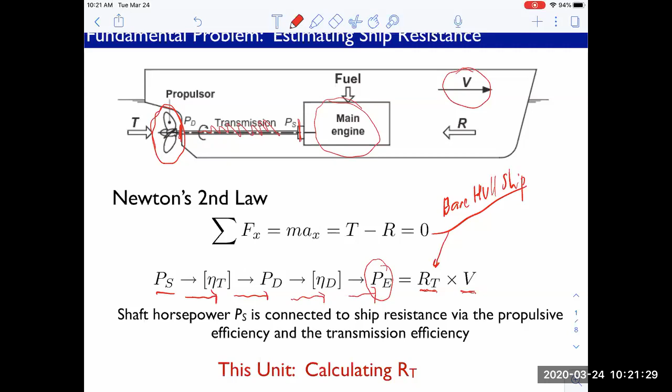We'd like to know, based on the model test, what the full-scale bare hull drag would be. By bare, I mean naked, not the animal bear. And v is the ship speed at which it moves. So really the point of this unit is how do we get to this RT?

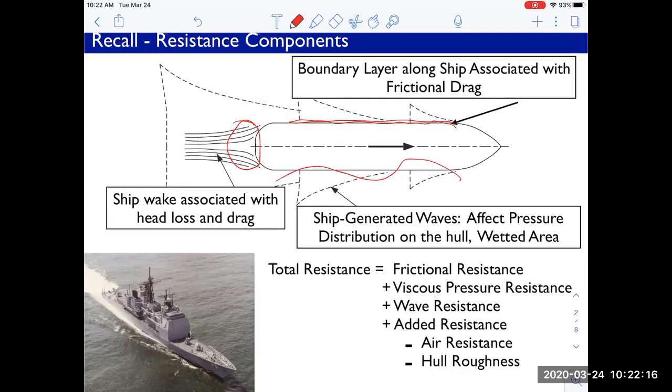It's pulling in all these pieces we've been talking about: boundary layers acting along, so skin friction along the side of the hull, the wave drag acting on the hull. That's a pressure component, but it comes fundamentally from having put energy into the wave field. Then the other pressure component, the viscous pressure resistance, comes from having separation in the stern of the ship, which leads to this non-zero pressure integral over the hull. It's a form of drag, and a significant one in a lot of these marine vehicles, because they're ultimately not that streamlined.

So we have these three drag components, and we talked about the physics of them in class. We talked about how we can do estimates of the viscous resistance, and how the wave resistance is tied very strongly to the Froude number. That's why in these model tests we test at the same Froude number, so at least the waves are similar. The wave field itself is the same on the model as it is on the full scale ship.

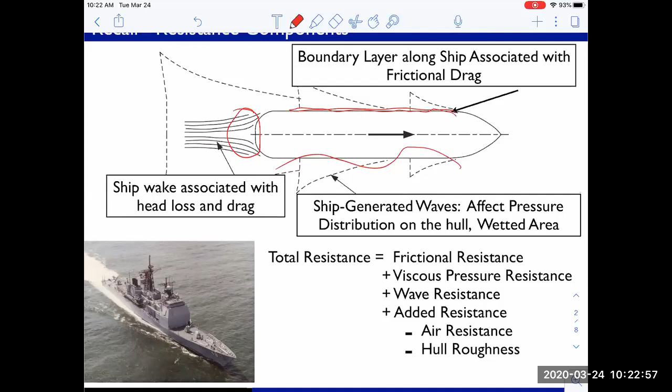So we have these pieces coming into play, and we're going to use the model to estimate some of them, and then estimate some of them externally, and combine them back together to get the estimate for the full scale ship.

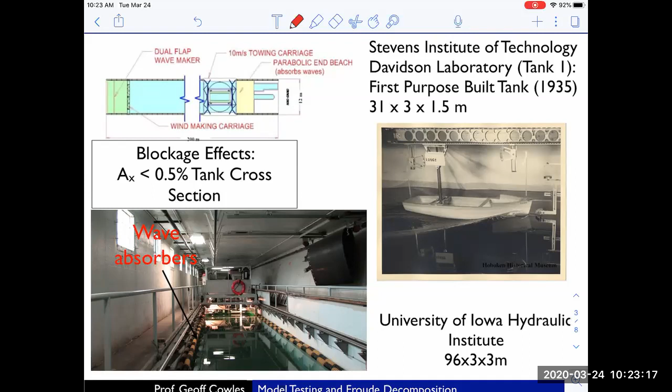I put a little lecture up about tow tanks. I'm just going to say something quickly about that now. This idea, contrast it with the idea of a wind tunnel, where you have... in a wind tunnel, I'll just grab another slide here.

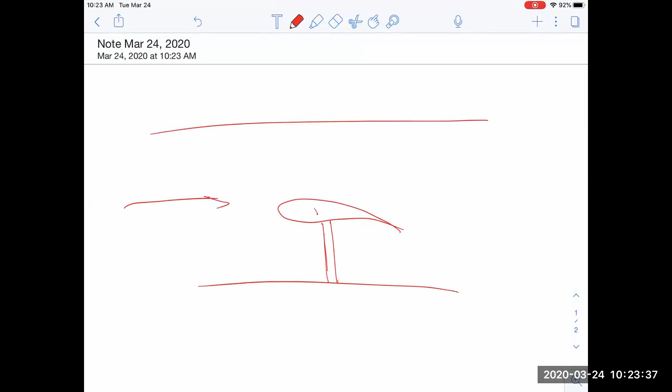You typically have a wing section in a tunnel, and the air is moving over this. The wing section sits on a sting like this, and that sting can measure the forces on it. Typically lift and drag forces are measured, and you can do other stuff like PIV. I put a little window on your tunnel, and you can do particle image velocimetry, all kinds of diagnostics, Schlieren diagnostics if you're doing supersonic flows. It's kind of convenient, all you have to do is pump air or water around this thing, and you're good to go.

Now, in the case of a free surface flow, you have the water surface like this, and you have a ship. If this is part of a big tank or a channel, and you pump this water around, it tends to get very noisy. The free surface starts getting noisy, and it's hard to have a nice flat free surface.

So what they typically do is keep the tank still and tow the boat through the water. This leads to some pretty big apparatus, because you have to tow it for long enough to reach a steady state. It takes a little while for the waves to form, for the boat to get up to speed, for the forces to reach some kind of steady state. And if you have diagnostics on top of that, you need time to run them.

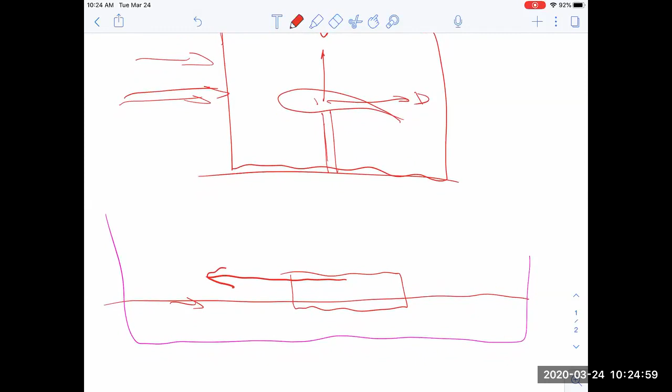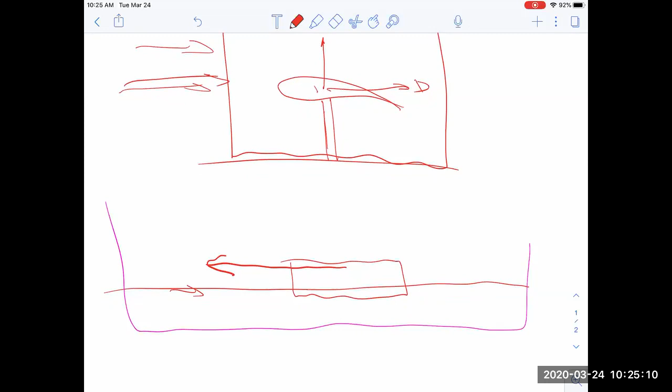Now, in the wind tunnel, you could essentially run it all day, have your grad students in there doing their measurements, and turn it off at the end. For the water tank, you just have that amount of time between when it starts and when it stops to do all your data measurements: resistance, PIV, wave cuts, and boundary layer measurements. So it's quite hectic. Then when you're done, you tow it all the way to the end, and then tow it all the way back.

And then you got to wait until the waves die down, because the experiment generates waves and currents in the tank. You have to wait until those die down due to friction, and the wave absorbers take care of the waves, then you restart the experiment. Maybe you're running a different speed, or often you'll run the same speed three times in a row just to get replicates, to see what kind of range you're getting.

And so that leads to these very interesting, unique apparatus, which are really long. Here's the Iowa tank right here. It's 96 meters long, and it's got a 3x3 cross section. Obviously a narrow, purpose-built room. The room looks like it was built just to hold the tank.

And then this thing right here just drives along these tracks. You can see these tracks here on either side. The operator or operators stay inside here, setting the speed and doing all the diagnostics, etc. So these things are very unique, whereas a wind tunnel, you could put lots of stuff in there and test it. This is really designed for model testing.

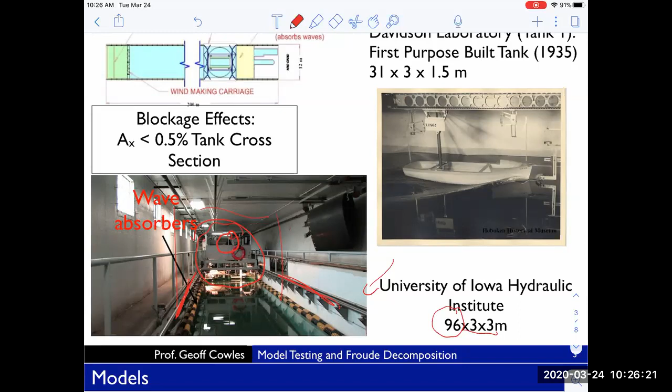Some of these wave tanks, including the Iowa wave tank, are designed so they can make head waves. You can generate waves at one end that propagate down the tank, and you can drive the boat into the waves, or drive the boat away from the waves. This can measure the forces on a boat in a head sea or a following sea. It's not big enough that you could do waves coming at an angle.

There are special tanks for that. But these narrow, long tanks, really you can only do directly into or directly away from waves. And there you're testing the wave length relative to the model length, trying to keep that the same as the ocean case. Not all the ship tanks have those wave generators or the capacity to do that, but the Iowa one does.

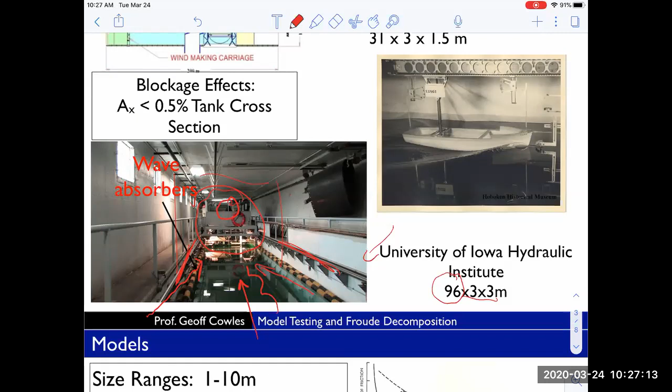I'll mention quickly, we'll do a question about this today, but you're looking to deal with this blockage effect to make sure that it isn't too strong. If you think about this, it's the same case with a wind tunnel, but you have a cross section of your wind tunnel or water tunnel.

In this case, if it's a tow tank, the ship hull might look something like this. The maximum ship cross section might look something like this, and you want to make sure that that's less than 0.5% of the tank cross section. The reason is, if we do a top view of the tank here, and our model starts to take up a big chunk of that tank, let's say it just barely fits in there, here's our ship model, and the water flows in and around, it gets squeezed around here.

It's the same effect as two train cars. I don't know if you've been on an Amtrak train that passes another one going the other direction, it actually sucks the trains together. So you start having an influence between the walls and the body itself, and it alters the flow around the vehicle, and you end up with a flow field which is vastly different than you would have in the open ocean.

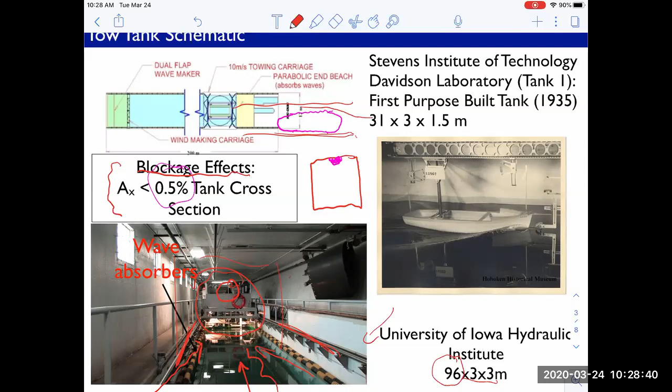So they try to constrain the blockage effects. I put a link up on my courses, actually I need to double check that I did that. There's a body called ITTC, I've mentioned this several times in my videos, the International Towing Tank Conference. It's basically a standardization group to standardize all aspects of model testing, resistance scaling, and these kinds of things.

They have numerous publications, and these committee meetings, and they make these really definitive decisions about how to move forward. That's to try to keep things standardized, to allow people to exchange data, have the data make sense to somebody else, to make sure everything's done in a uniform manner. They have papers essentially on model testing, and they include in the process of scaling up the model how to account for blockage effects if necessary, to reduce the influence of the walls on the body itself.

So when it's less than 0.5%, those blockage effects tend to be pretty small, certainly negligible for our class exercises. If you're doing real engineering work where you've gone and spent $200,000 on your model test, then obviously you want to go into the accuracy of accounting for blockage effects.

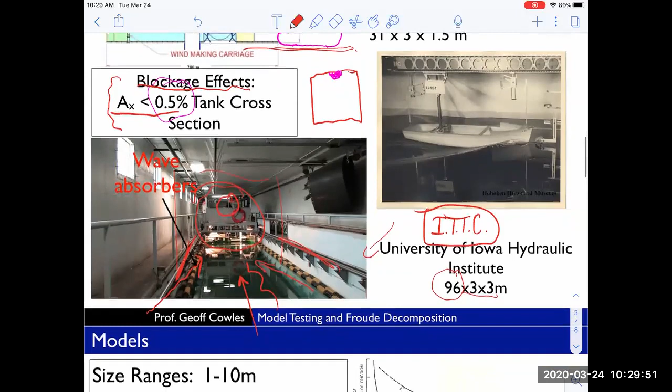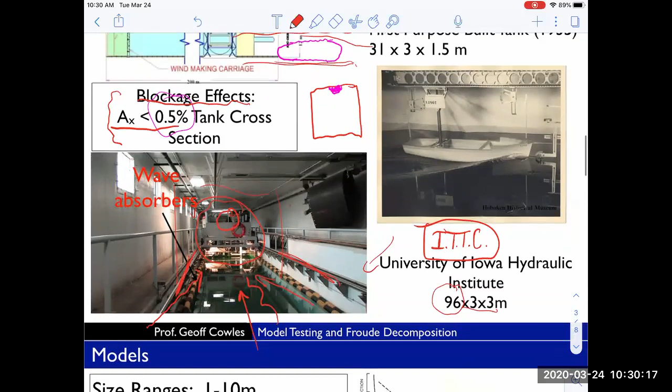In this country, the very first tank was at Hoboken, at Stevens Institute of Technology. This was named after Ken Davidson, who pioneered model testing here, originally in their swimming pool, and eventually they made him a tank, or he made a tank. There's still 3 or 4 tanks there now: high speed, low speed, maneuvering, and waves.

One slide I think I forgot to go through in the recap, so I'll mention it here, is a quick slide about models. You're dealing with size ranges from about 1 meter to 10 meters, 10 meters because the tanks don't get much bigger than the Carderock tank. So you're constrained about how large the models can be and still not have significant blockage effects. About $1,000 a foot—this is getting to be an antiquated number because a lot of the model construction is getting more automated than it was in the past.

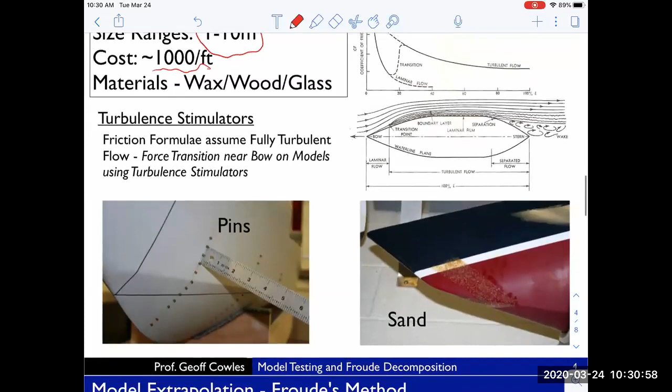Various materials are made for making these models. There was a question we had on homework at one point, and I want to show you what these things actually look like now, which are called turbulence stimulators.

The idea of turbulence stimulators is to make sure the flow is turbulent on the hull. We've already seen that for models that are shorter and move at slower speeds, the Reynolds numbers are lower, in many cases much lower than at full scale. If our Reynolds numbers are in a range where we might have some laminar boundary layer and some turbulent boundary layer, we have an issue, because in our resistance decomposition methods we'll be estimating the skin friction on the hull. If you don't know precisely where the point of transition is, it's very difficult to get an accurate estimate of skin friction on the hull.

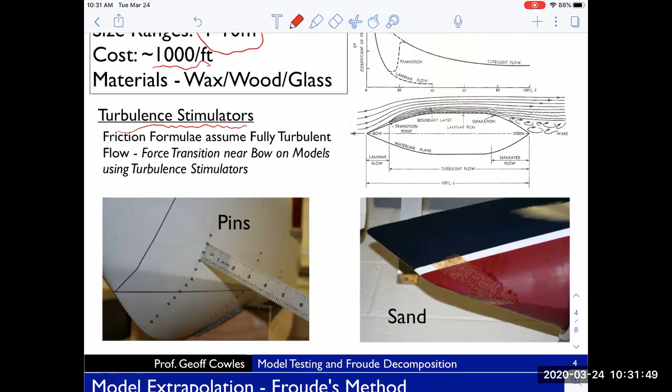The second issue is that full-scale boats, for the most part, have turbulent boundary layers, and that influences the nature of the separation at the stern. So if your models are laminar and your full-scale vessel is turbulent, you're really very far off in terms of mimicking the viscous effects. There's no way to make it entirely the same because your Reynolds numbers are different, but at least you can make it turbulent—and that's what these stimulators do.

You can see on the bow of the sailboat here, it's basically glue and sand—that is a sand strip. Here are pins on the very front of, I'm not sure what model this is. It has a hard chine—you can see this chine here—so this indicates to me it's probably a high-speed boat. But you have these pins here.

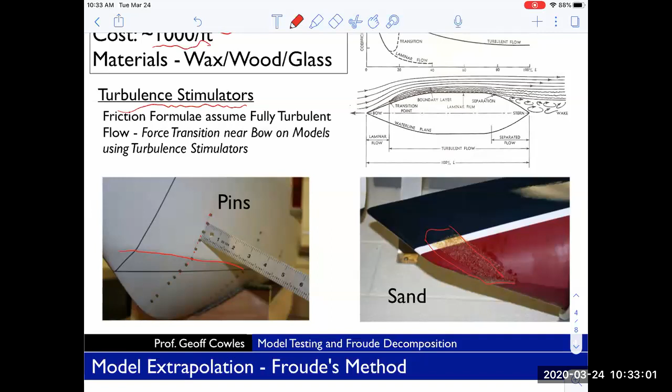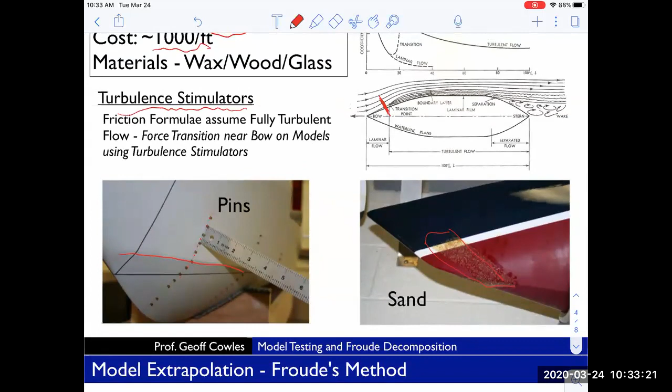What these do is stimulate the boundary layer to become turbulent even at lower Reynolds numbers. In the absence of this roughness, with a smooth hull, they would not be transitioning in this location, but it forces an early transition. The ITTC documents talk about how to stimulate the boundary layer and how to account for the stimulation. So basically you're forcing an early transition, so you know the boundary layer is largely turbulent, and then you can take the friction formula we'll be using, which is designed for turbulent boundary layers, and use it with confidence. That's the point of these.

So these are quite common in the process of model testing. The first method we'll be talking about today, and we're going to work a problem on this, is Froude's method. We're contrasting two methods here. This is not the standard method, but I wanted to do this for historical reasons, and it's important to contrast the two, because this was used up until, say, the 50s or 60s.

This was widely used, and then they started realizing it was missing something, that it could be improved upon, and that ultimately led to the ITTC '78 method that we'll be talking about on Thursday. As part of your Thursday prep, you'll see that. They're quite similar, so I want to contrast what's going on.

The idea goes back to the same premise we started the semester with, talking about similarity analysis: that the total drag coefficient for the ship problem is dependent on two fundamental non-dimensional variables, which I'm certain you're familiar with now, the Reynolds number and Froude number. If we could match both of these, this would simply mean that the total resistance coefficient for the model is identical to the full-scale boat.

All we would have to do is measure the model drag, convert it to a total resistance coefficient. That would be the same on the full-scale boat, and then scale it up to full-scale resistance just by dimensionalizing it, and you're done. But we cannot match Reynolds and Froude. So the decision Froude basically made was to match the Froude number and let the Reynolds go.

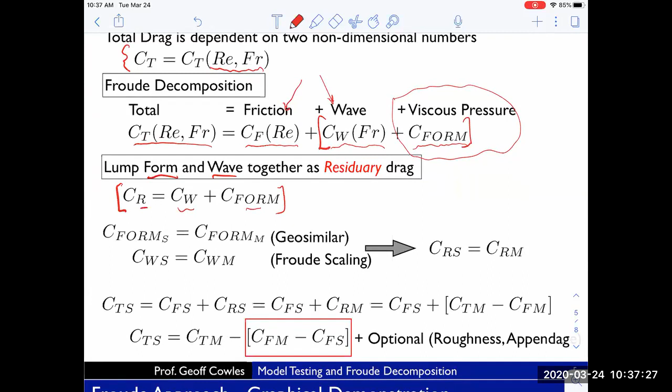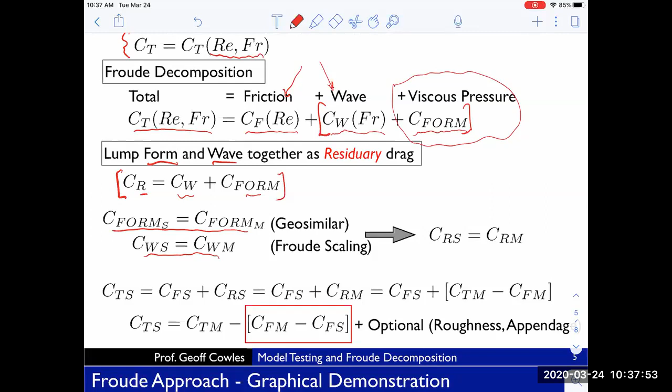Now, since the form drag coefficients are the same on model and full scale, and the wave drag is the same on model and full scale because you're matching Froude - you're matching the Froude number on the model and full scale, that's Froude scaling - because you have matching Froude and you make this assumption that the form drag coefficients are the same, then the residuary drag, which is the sum of both of those, is the same on the model as it is in the full scale.

So the residuary drag is, again, the drag that's left over after you've removed the frictional drag from the total drag. Then we can just do a little bit of algebra, where we have our total ship drag coefficient made up of this frictional drag coefficient plus the residuary drag, which again includes the wave and the form.

This is equal to the frictional drag on the ship, where my subscript S here is for the ship, the full scale, and subscript M is the model. So the full scale drag coefficient on the ship plus the residuary in the model, because the residuary in the model is equal to the residuary in the ship - these two things are equal, that's what we already showed.

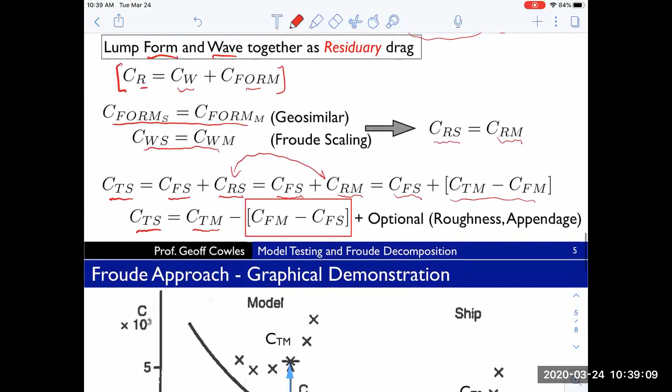And then we have this residuary drag in the model is just the difference between the total drag on the model and the frictional drag on the model. So this is equal to the frictional drag on the ship plus the difference between the total drag on the model and the frictional drag on the model. Then we just do some rearranging, and we have that the total drag coefficient on the ship is equal to the total drag coefficient on the model minus the difference between the frictional drag on the model and the frictional drag on the ship.

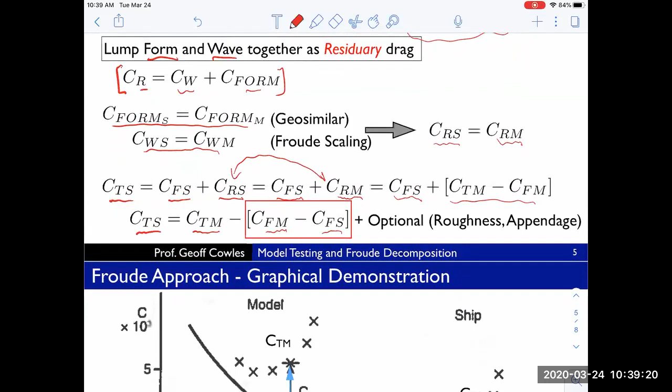If we could match Reynolds numbers, the frictional drag coefficient on the model and on the ship would be identical, and that red box would be zero—you'd simply have total drag coefficient on the ship equal to total drag coefficient on the model. But because we don't match Reynolds, what's in that box is non-zero, so we have to account for it.

That's going to be estimated. Those pieces are going to be estimated in the red box, and we'll see how in a second.

In the standard Froude form, you also typically add additional drag coefficients. One might be for appendages. For example, if you're testing sailboats, you test in the tow tank with just the bare hull, without the keel or rudder, because you want to see how it works with different keels and rudders, and it's expensive to do that in the tank. So you just tow the bare hull, and later add additional drag due to those components.

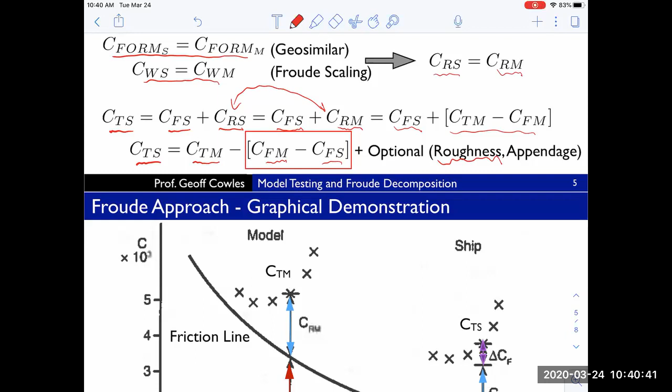The other key one is roughness. A real boat in the open ocean has biofouling—the hull builds up roughness over time. It's difficult to mimic that in the tow tank because it varies over time. So in the tow tank you use a smooth model and account for the roughness of a real ship by adding a standardized drag coefficient. There's some difference between the Froude method and the ITTC 1978 method in how roughness is treated, and we will look at that.

Graphically speaking, it looks something like this. These are coefficients times 10 to the 3—times 1,000—so you end up with numbers like 2, 3, 4, rather than 0.002, 0.004. That's typically how they're plotted. On the bottom, I have log 10 of the Reynolds number.

If you do an actual resistance test, the Reynolds number of the model is smaller, so you end up with data scattered over here. These are the total resistance coefficients measured in your model test as a function of Reynolds number. In the Froude method, this is divided into two pieces: a residuary piece and a frictional piece.

The frictional piece we estimate using a friction line, which is a function of Reynolds number. We can draw the position of the top of this red section as touching the friction line curve—essentially translating this blue arrow over to the full scale Reynolds number here.

And it's these crosses, which I'll paint with this pink paint—these are what you're trying to estimate. You don't know what these are; we're trying to estimate what these are. So this blue arrow, you're essentially translating over.

That's the part of physics that's hard to get at. It's hard to come up with a formula for the viscous pressure drag or the wave drag—complicated to model, complicated to do CFD on. So that's really what we're relying on the model tests to do: tell us that. We'll be in charge of estimating the friction.

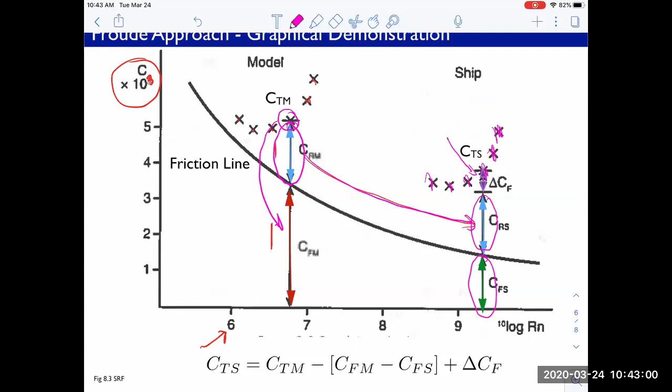And then any additional roughness that needs to be accounted for, and we're done. Essentially we have a total drag coefficient.

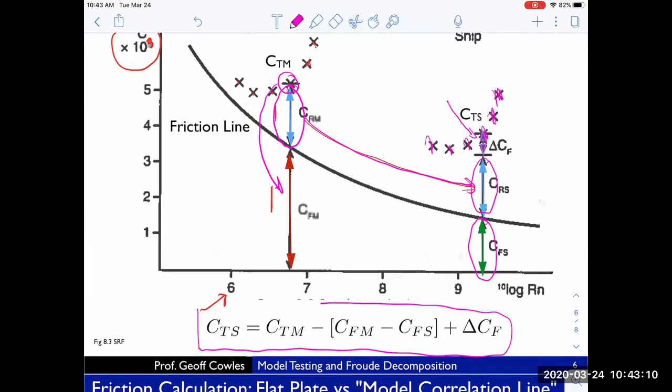So I just listed a number of steps. Algebraically, you can just do it in one shot—it looks something like this equation right here. That's what we'll be applying to scale up this value measured in a tow tank to get this value of the total ship resistance.

And from there we can get the actual resistance of the ship. That's what we'll do in our class exercise today.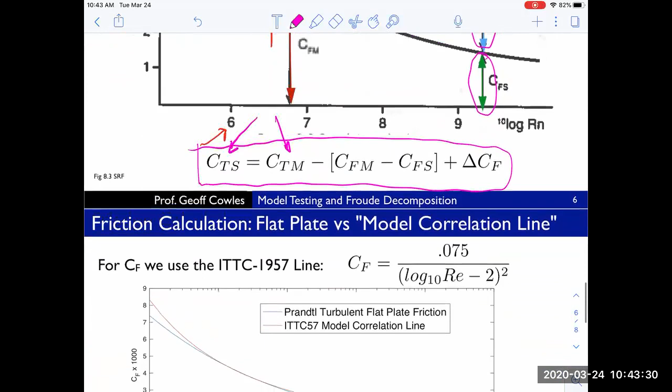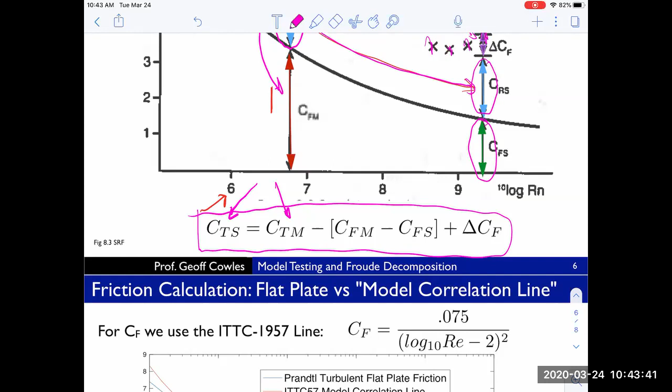I want to be clear, we've used in class Prandtl's friction line for flat plate assessments, estimating turbulent skin friction for a turbulent boundary layer on a flat plate. The early attempts to do friction lines used something quite similar to that. What they found was, because it didn't take into account the curvature and three-dimensionality of the hull—which we've seen, particularly with the XFOIL simulations—the skin friction distribution deviates from a flat plate once you get some thickness to the body, so it's accelerating in some sections, decelerating in others.

That idea of using a flat plate starts to fall apart, particularly if you're trying to do something accurately. If you're trying to get an estimate, it's still pretty good. If you're trying to get an accurate assessment, it's not so good anymore.

Over the years, there were a number of these lines that were used, and on Thursday I'll present a little bit of history of them. It actually depended where you were—the US was using something different than Europe. And there are these various friction formulas. We've looked at Prandtl's for turbulent flow.

What we'll be using for all our exercises in our class is what's known as the ITTC 1957 line. It was just established in 1957—that's the International Towing Tank Conference. It has this form right here, which looks quite different from Prandtl's.

Remember Prandtl's is 0.074 over Reynolds number to the 1/5. So the functional form is quite different—that one goes inversely as Reynolds number to the 1/5, while this one goes inversely as the square of some deviation between the log of the Reynolds number and 2.

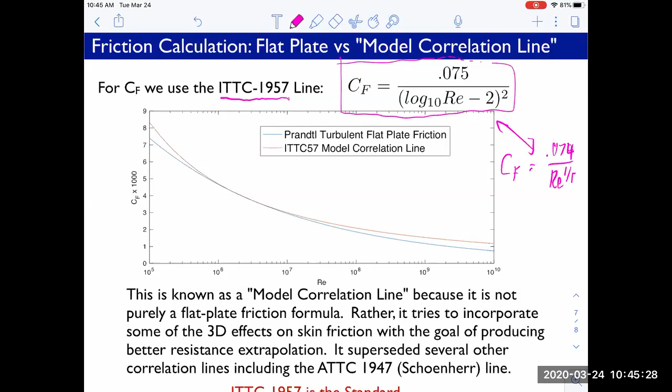So they're quite different, but when you actually plot them together—this is CF times 1,000 versus Reynolds number over a pretty big range from 10 to the 5th all the way to 10 billion—you can see there's an intermediate range from about 1 million to 10 million to 50 million even, over which they're quite similar, and then they start to deviate.

This is trying to improve what is going on in terms of model scaling. I'll talk a little bit Thursday on how they assessed whether the scaling was working.

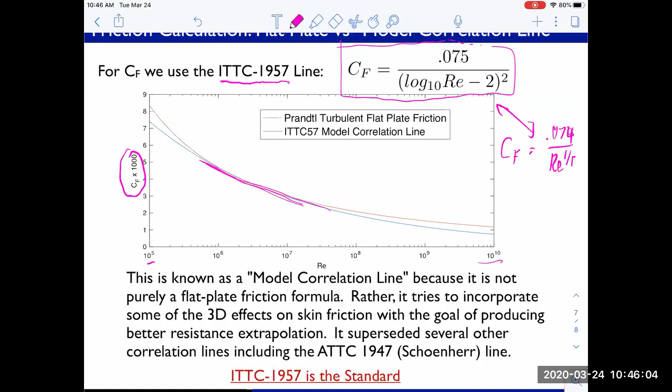So they make these assessments and say, okay, we're scaling, we're getting resistances that are higher than they should be or lower than they should be. What they did is go back and make adjustments to these friction lines to try to improve those correlations, to make them work better. I'll show you some of the intermediate lines that were used and have now been scrapped over the years.

Some of the complications are that when early tow tests were done, they towed the boats, but the tow test data isn't the full resistance of the model, which would be useful. What they're presented as is, for example, a residuary resistance—what was left over after they removed friction from the model. But then you have to see, okay, what friction curve did they use to get to that residuary resistance? It makes working with older model data kind of complicated because of this transitional period when various friction lines were used.

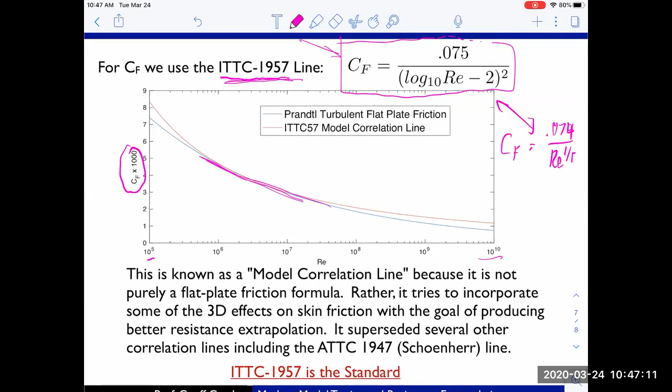So for all our calculations in the class regarding model correlation and extrapolation, we're going to be dealing with this particular line, written right here, which is also in your book, instead of Prandtl. I just want to make that point.

So the Froude's method recipe, which we're going to use in a problem in a few minutes: measure the total resistance in a tank. This is done with a dynamometer attached to the carriage, which is towing the boat along. It doesn't reach full resistance right away—it might spike a little higher than the total eventual resistance—but then the resistance will reach some kind of steady state, and that's the value that's recorded for that model at that speed on that day.

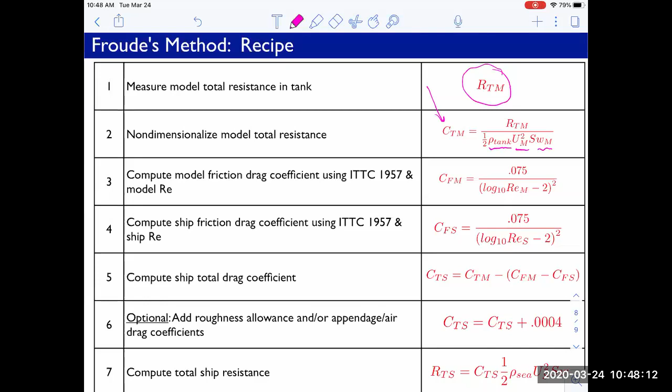Then you convert this to a total resistance coefficient. So we take that total model resistance and non-dimensionalize it, as we've done all semester. It's important here to use the density of the tank water and the speed of the model squared—that's the dynamic pressure in the tank for the test. So it's specific to the tank conditions, the model speed, the tank density, and the wetted area of the model. This gives us a total resistance coefficient for the model.

Then we need a friction coefficient for the model, so we use the ITTC 57 line with the model Reynolds number. The Reynolds number for these boats is U, the velocity it's moving, times the length of the boat, divided by the kinematic viscosity. For the model, these will be model speed and length, and this nu here is the kinematic viscosity for the tank. So typically, what they always do is measure the temperature of the tank.

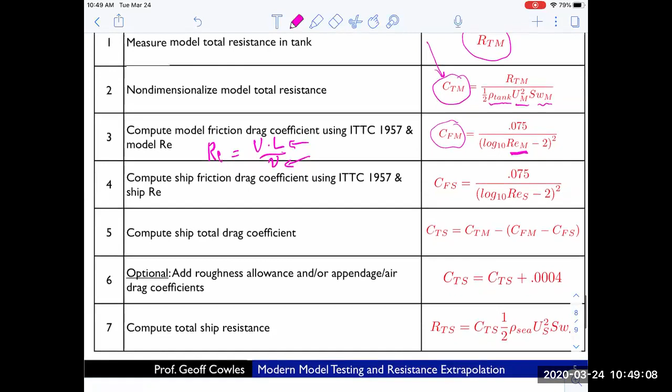If it is a seawater facility, which a few of them are, you need to know the salinity of the water to get an accurate estimate of nu. That gives you the Reynolds number used in the friction coefficient for the model. Same thing for the full-scale ship, except here we use ocean salinity, density, and kinematic viscosity for the Reynolds number.

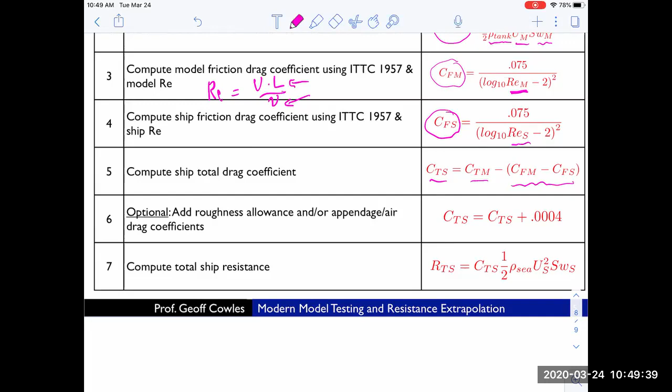Then we compute the ship total drag coefficient from our algebraic formula. The total drag coefficient equals the total drag coefficient of the model minus the discrepancy between the frictional drag on the model and the frictional drag on the ship, which will be different because the Reynolds numbers are different.

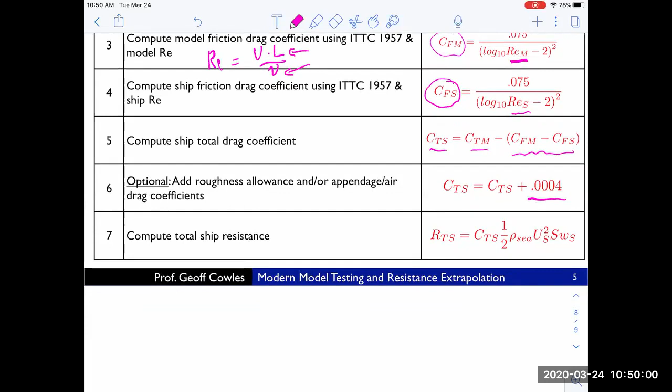Then we add a standard roughness. For the Froude method, that roughness is 0.0004 - a fixed number. For the ITTC 78 formulation, or the form factor formulation we'll look at Thursday, it uses a more sophisticated roughness allowance that takes into account the expected roughness of the hull.

Then you're done - you have the total, and we compute the total ship resistance coefficient by dimensionalizing it. But here you need to use the density of the ocean, which we've been using as 1,025 as a good approximation, the ship design speed squared, and the ship wetted area.

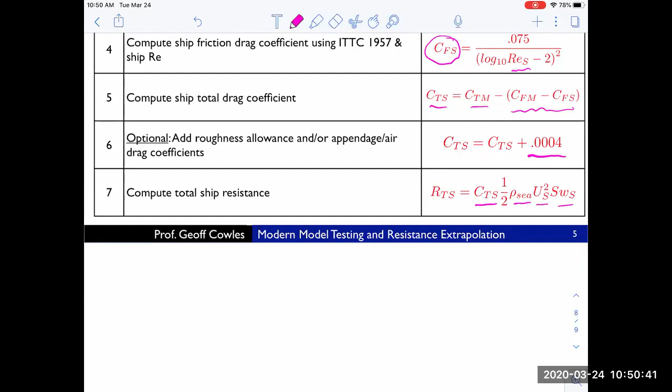So that's the process. What we'll look at on Thursday is not what's standard today - this is historical, but I want to contrast it to show you the improvements they made. It's quite similar though; the steps are just slightly different from what's used today.

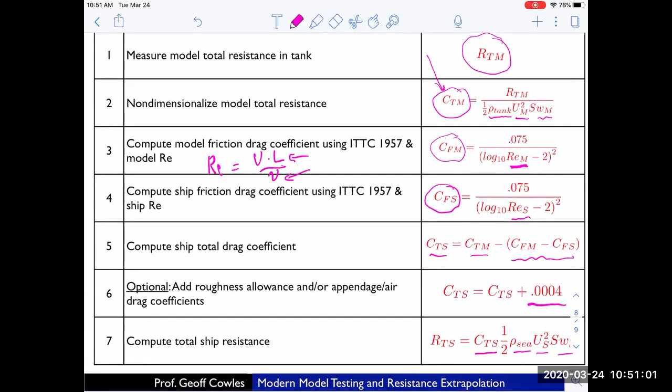So what we'll do is work through one problem together. There's a homework problem quite similar to this one, where you'll do it yourself with different numbers to get a feel for the process. Let me go to the in-class problem - I have this posted on my course site along with the solution, which will appear shortly after I do this.

So this deals with a naval combatant. You're given the length of the ship, the beam, the draft, the volume displacement, and a maximum sectional area AXS equals 96 meters squared.

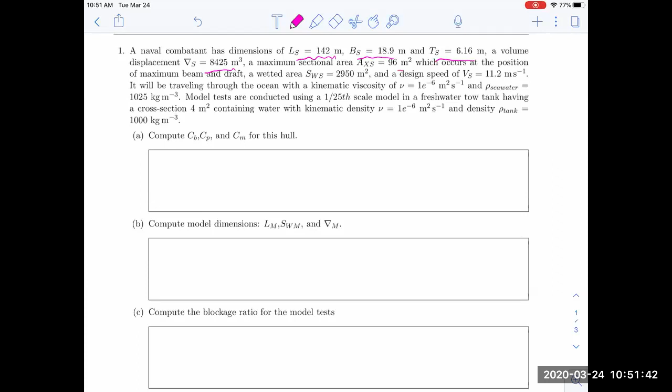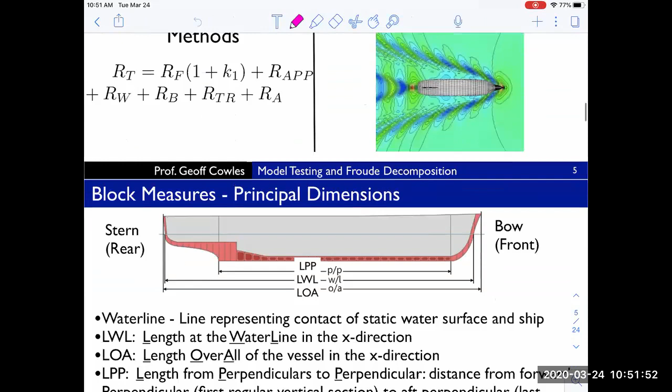I just want to jump to the lecture notes for a second to make sure you know what this maximum area is - sorry for the scrolling. Did I pass it? Yeah, so maximum area - this shows a ship here. Hopefully you reviewed the coefficients of form I discussed in lecture: block coefficient, prismatic coefficient, and maximum area coefficient.

That maximum area is basically slicing the hull longitudinally, so it's a constant YZ slice. At some location X, you're slicing with a YZ plane, and wherever you get the biggest area of the slice, that is your AX. Typically it's around amidships, usually slightly aft of that - the sectional coefficient is maximum a little behind amidships, but never more than a few percent after that for typical boats. There might be some radical boat where it differs, but for typical boats that's how it works.

So that's what this AX is. Let me go back to our lecture. So you're given the sectional area, and I state here that it occurs at the same position where the maximum beam and draft occur, with a wetted area of the hull of about 3,000 meters squared. The design speed is about 11 meters per second.

Again, that's for the full-scale ship. You're given the ocean conditions through which it's traveling, which is necessary for computing the full-scale ship Reynolds number and for dimensionalizing the drag at the end. You need the density for that.

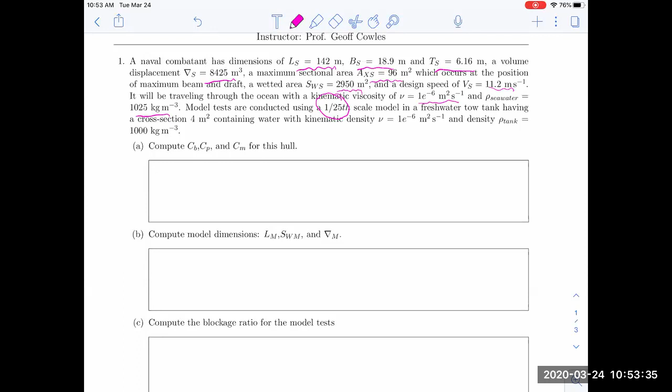The model tests are a 1/25th scale model, which seems like a pretty strong model scale, but with a 142-meter ship, that's about what you end up with - tested in a freshwater tow tank. The tow tank has a cross-section of 4 square meters, so it's a 2x2 tank. The kinematic viscosity in the tank is about 1x10^-6, and the density of the tank water is 1,000 because it's filled with fresh water, as most tanks are.

So the first part goes through, it says, okay, so we want to get some coefficients of form for the hull. We will be seeing these more through the remaining weeks of the semester because there's been a lot of effort of really tying drag coefficients to the coefficients of form, to understand how, when you vary the block coefficient, what happens to the total drag when you vary the prismatic coefficient. And this allows designers to make changes to the boat to improve upon the resistance characteristics once they make this understanding. And actually this should say CX, sorry, CX for the hull.

The coefficient for the maximum transverse area for this hull. And so we have CB, block coefficient. This is probably the most important form coefficient, the block coefficient, which I went over in the video. And this is, again, just the ratio, the actual immersed body of the hull, nabla, which was given in this problem, divided by the box in which that exactly sits.

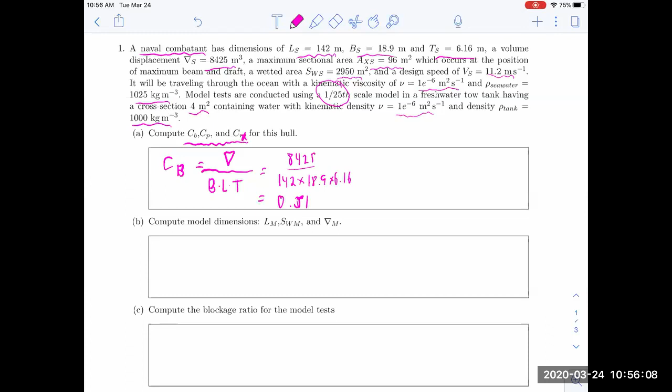So that's a lower block coefficient, a bit lower than, say, a cargo ship. And this is more akin to what you would see in a naval combatant, which is a bit more streamlined, has more pointy ends, particularly the bow is pointier than the cargo ship. So you have a lower block coefficient than a cargo ship, but a bit higher than, say, a sailboat. The prismatic coefficient, CP, is the ratio between this displaced volume, the immersed volume of the hull, and a prismatic form.

And maybe I will just pop over to show what that looks like. Prismatic coefficient, you take this maximum area, sectional coefficient, and just extrude it, like you're using whatever CAD program you guys use, I have no idea. Extrude it back and forth to create a prismatic volume in which this boat can fit, because you use the maximum sectional form and you extrude it the full length of the boat.

Obviously that prismatic volume is smaller than the box or block that you use for the block coefficient. So we're going to end up with a higher value for the prismatic coefficient. So then that is going to be equal to this over AX, that's the maximum sectional area, times the extrusion distance L. And this ends up being...

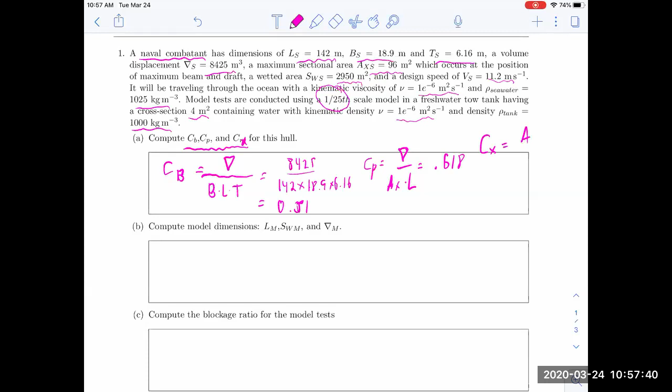0.618. And the last one is this sectional area coefficient, in this case maximum, what we call CX, which equals AX over BX times TX.

And what this pertains to is you have some sectional maximum section of the hull, might look something like this. And at that position of the maximum section, you take the beam, which is this distance from here to here, and that's BX. And you take the draft, which is the draft at the position of that maximum section, which is TX.

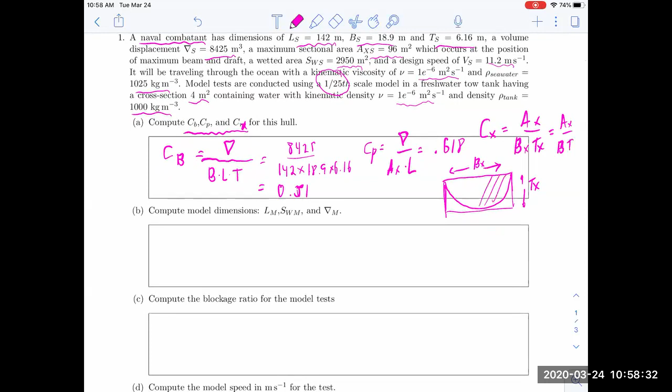Now in the text above, I noted that the maximum section occurs where the maximum beam B is and the maximum draft T is. So BX and TX are just B and T for this particular case. In most cases, it'll be close to that, BT. And you're essentially saying how much of this rectangle is filled up by that section. And that, for this case, ends up being 0.824.

And when you look at boats, you see all kinds of sections used. Cargo ships tend to use very U-shaped sections with fairly hard corners like this, so their sectional area coefficients are quite high, whereas boats like destroyers or sailboats tend to use rounder cross sections, so their sectional area coefficients are lower than the cases of cargo ships. And again, it's always a trade-off of what's the practicality. We might incur drag costs, but at the same time we can hold more volume, which will have bigger payoff in terms of shipping costs or shipping revenue to overcome the additional fuel needed to overcome that resistance.

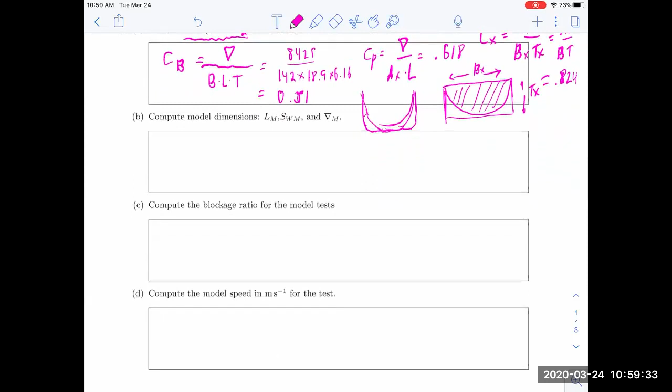So compute the model dimensions. I want to know the length of my model, the wetted area of my model, and the displaced volume of the model. This gets into the geosimilarity rules we had. This is a geosimilar model, and lambda was equal to 25, so it's a 1/25th scale model. All length scales, including the actual length, are simply lambda less than the full scale ship. So LM equals LS over lambda, which equals 5.68 meters. That's a pretty big model, and when you think about the difference between the full scale ship and the model ship, it's significant.

We end up with still a fairly large model. This couldn't be tested in any given tank. You'd need a big tank.

You have the wetted area of the model. Any area, cross-sectional areas, surface areas of any kind scale as the scaling parameter lambda squared. So the wetted area of the model is equal to the full scale area, SWS, divided by lambda squared. Lambda squared in this case happens to be 625, that's 25 squared. And you end up with a wetted area of the model of 4.71 meters squared.

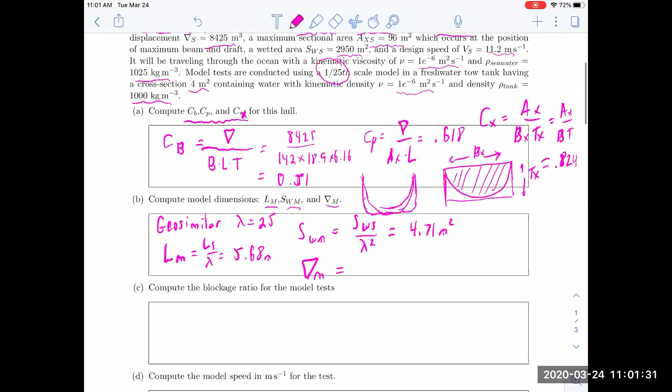Finally, the immersed volume of the model, nabla M, is any volume on the model—could be the volume of the immersed hull, could be the volume of the superstructure. Volume scales as the scaling parameter cubed, so this will be the full scale ship divided by lambda cubed. This value ends up being 8,425 divided by lambda cubed, which is 0.540 meters cubed.

Now, one of the exam problems showed that with Froude scaling, the wave drag scales with the volume of the hull. That was one of the things we worked on in class—the wave resistance scales with the volume of the hull. So you can see here the wave resistance in the model would be expected to be 25 cubed times less than the full scale.

The skin friction scales somewhat close to the surface area of the hull—skin friction is all about surface area, or wetted area. The wetted area of the model is lambda squared times less than the full scale. So we can see that on the model, we're expecting a higher fraction of friction resistance than wave resistance, because our displacement went down by lambda cubed, but our surface area only went down by lambda squared, which tells us we're not going to get the same ratio of skin friction to wave resistance on the model as on the full scale.

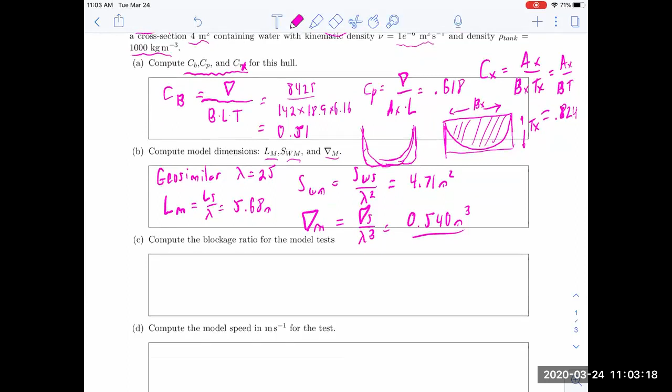Models have a higher fraction of friction resistance relative to total resistance compared to full scale. This is just the nature of scaling these two things. We'll see this when we construct the actual values in a second.

The blockage ratio: for this, we're given that the water tank cross section is 4 meters squared, and we had a maximum cross-sectional area—this is a transverse view showing the model coming at you. We need to compute AX for the model, which equals AX for the full scale ship divided by lambda squared. Again, any area, as long as you're talking about the same thing on the model and full scale, since they're geosimilar, scales as lambda squared. This works out to 0.154 meters squared, since we were given AXS and we know lambda squared is 625.

Our blockage ratio, BR, is equal to AXM divided by the tank cross section, which is 4 meters squared, and that works out to about 4%, call it 0.04. So we're less than 5% in the tunnel, but it's getting to be what I'd call a high blockage ratio—this might be a concern. I'd say this is a concern.

So that gives you an idea of how to compute that. And the model speed—this is a really critical thing, of course. We're using Froude's method, what he referred to as the corresponding speed. This was the big difficulty in early model testing: what speed you run the model at. Some people thought you just run at the same speed as the full-scale ship. Some thought you run at a speed equal to the scaling ratio, so in this case 1/25 of the full-scale ship. But neither of those really worked with the physics.

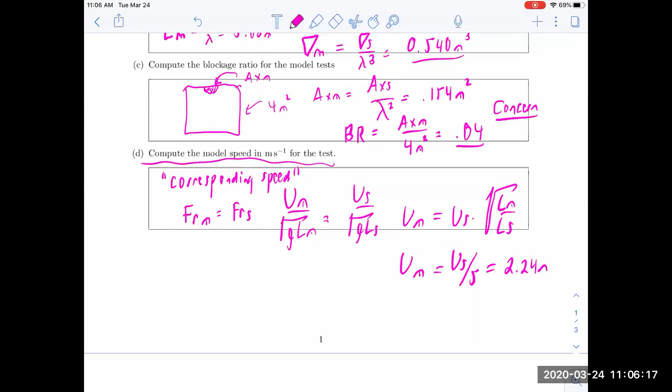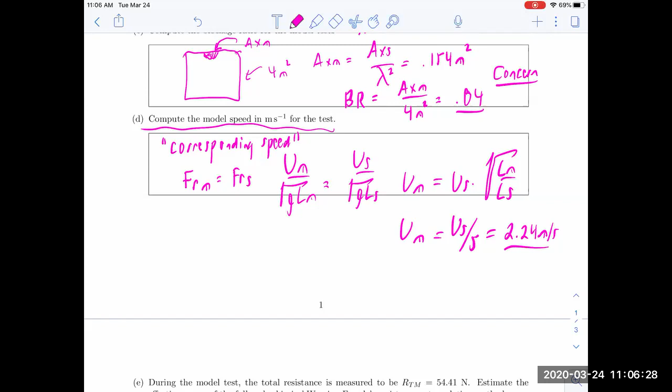So we can see the model speed is less than the ship speed by a factor of 5. The model is shorter than the full-scale ship by a factor of 25. So we can already see that the Reynolds number of the model is going to be much smaller than the full-scale ship. So this is again the corresponding speed, matching Froude number. You come up with this calculation. So this is a good thing to at least know that comes directly from the Froude number, and it's good to memorize or just have in your head.

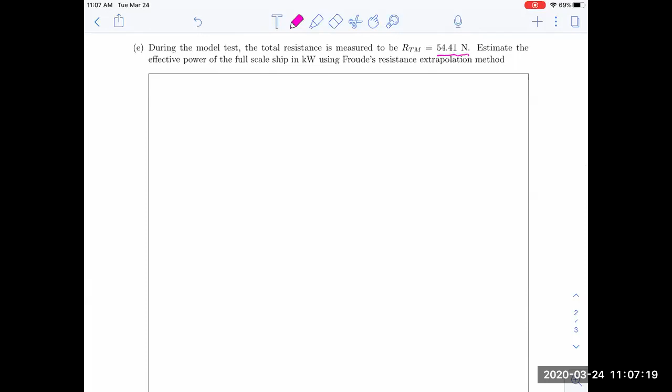All right, so the last thing we want to do is actually use Froude scaling to scale up the total resistance. So you're given here that the model total resistance in the test is equal to 54.41 newtons. And we're going to use Froude's resistance extrapolation method to compute the effective power, PE, the effective power of the ship in kilowatts, using Froude's resistance extrapolation method.

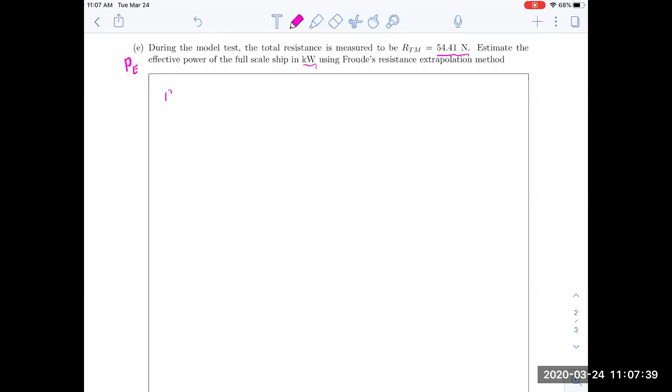So this goes back to that recipe. And the recipe is, hopefully I'll get the steps right, but the first step is we need to compute the total resistance coefficient of the model, compute CTM. So we have RTM, we need CTM. So CTM is going to be RTM divided by 1/2, divided by our dynamic pressure in the tank. So that's 1/2 rho tank times U model squared. We know all these things.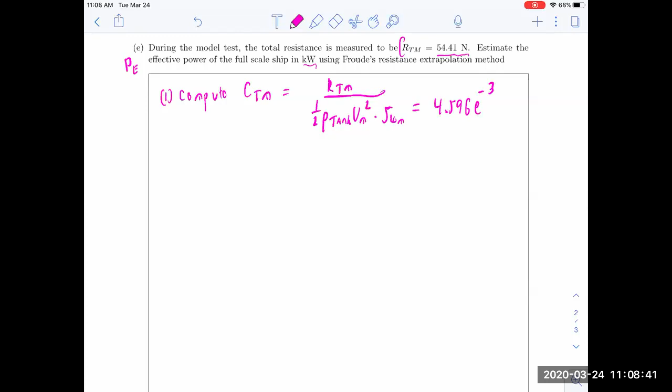Rho tank was freshwater again, so it's 1,000 kilograms per meter cubed, times the wetted area of the model, which we computed in part B or C above, times SWM. And this gives us a resistance coefficient of 4.59 e to the minus 3. And if I write it as times 1,000, it would just be 4.596. So that's the total resistance coefficient of the model.

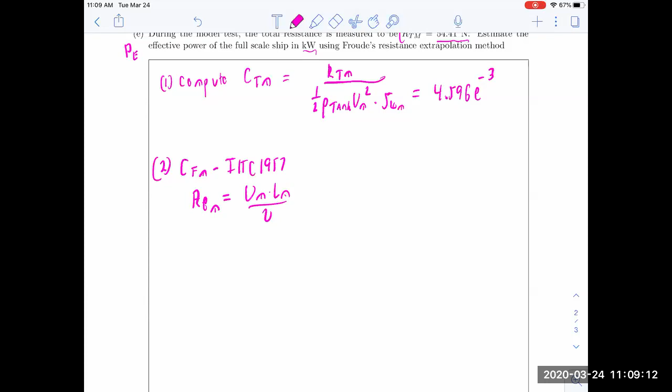And now we need to know the friction coefficient on the model, using the ITTC 57 line. So we need to know the Reynolds number of the model. That's going to be U model, L model, divided by nu. I left nu the same for both cases, but we'll put nu tank here, because this would be the kinematic viscosity of the tank. If we had some precise value, and again, they measure the tank temperature during the tests to get that nu. There's standard formula online you can look up for fresh water, what the kinematic viscosity is as a function of temperature. In fact, there's some MATLAB codes that can do that for you.

And we have the model is 12.72 million. So it's a fairly high Reynolds number for a model because it's a big model. It's 5 meters long. Most of the, when we look at the systematic series starting next week, we'll see that a lot of those systematic series model lengths are around 2 meters, somewhere around there, more typical lengths used mostly to keep costs down and because of the tanks that they were run in.

So CFM, we're going to use this ITTC 57 line. This is going to be 0.075 divided by log 10 of REM minus 2, squared. Okay, and so we're going to plug in that value there, and this will be equal to 2.878.

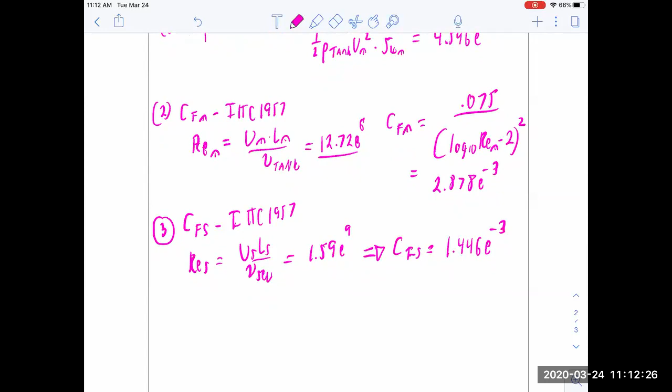So whereas the residuary component, which includes the wave, is the same on both, we have that this frictional component on the ship is less than it is in the model, which tells us the wave is more, relatively speaking, more important on the full-scale ship than it is on the model in terms of the overall drag, as I mentioned before.

All right, and so now we have, I think, all our pieces. I may have our step numbers not quite matching the recipe I showed you before, I apologize if that's the case. In fact, step 1 should just be measure the model speed, so this is really step 2. If we want to keep it like our recipe, step 1 is actually just measure the resistance.

Step 5 is our total ship drag coefficient without any added roughness, CTM, minus this discrepancy between the model and the full scale. I'll caution you, sometimes you see this formula written where they put a plus here and switch these two, so just bear that in mind.

Bear in mind that whatever you've written here should result in a lower total drag coefficient for the ship than the model. So whatever you're subtracting off here should be a positive number. So you have CFM, which is greater than CFS, will have a positive number from what's in that parenthesis. And this is going to be equal to 3.16 e to the minus 3.

And this is the total ship drag coefficient. You can see that it's less than the total drag coefficient of the model, 4.596 versus 3.16. Of course, this does not mean the total drag is less, it's the drag coefficient. Our next process will take us to the total drag.

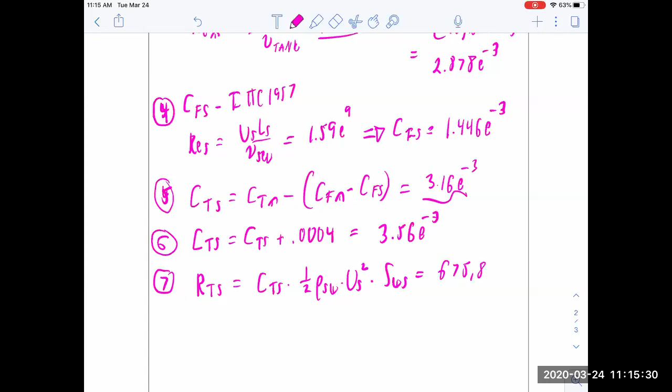675,825 newtons. And now we can compute the effective power. So the effective power is the bare hull resistance, which we just computed, times the speed of the ship. That's the power that we need, the actual propulsion needed to move the bare hull through the water.

And so this works out, just multiplying these two together, to about 7.56 megawatts. I think I asked for the answer up there in kilowatts, but I'll write it here in megawatts. And this works out to about 10,000 horsepower, I think it's like 10,100 horsepower. So, a big vessel, a lot of horsepower, a lot of megawatts of power, and this is to move it at its design speed.

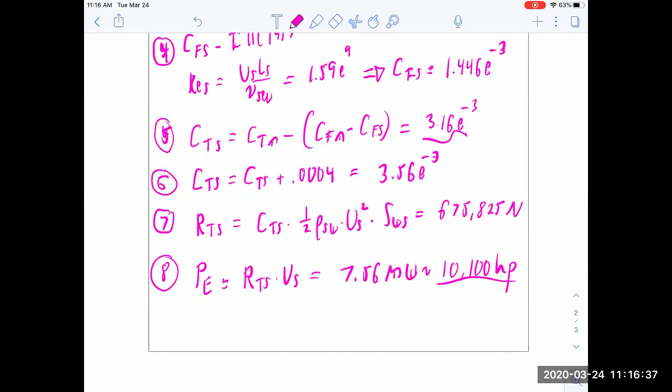So essentially we used Froude's extrapolation method. We started with the model resistance and we extrapolated up, and so it's essentially like a recipe. I'd like you to have a sense of what's going on in terms of what are the assumptions, so I'll just flash back to that and I'll stop the lecture. Again, in the Froude method, you have... apologize, I went past it.

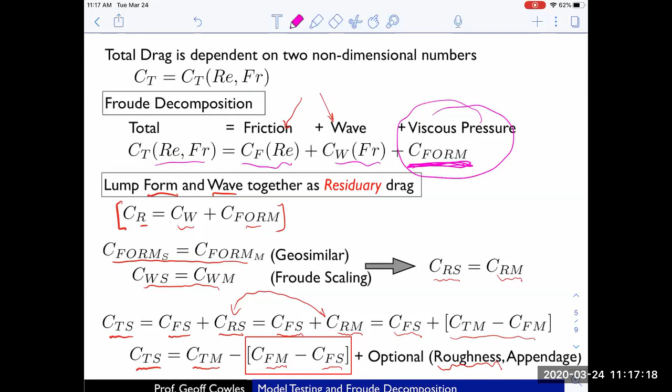You have this idea that you're splitting the total resistance into a frictional piece dependent on Reynolds number, a wave piece dependent on Froude number, and a constant piece. This is where it's going to get different when we get to the Hughes or ITTC 78 method on Thursday. This constant piece tries to treat this third form of resistance, which is due to separation and boundary layer thickening in the stern. Then we lump these two together because they're both essentially going to be the same in the model and full scale.

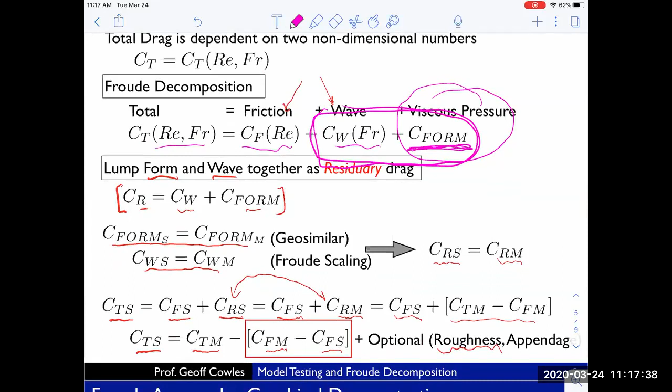The wave drag will be the same coefficient because we're matching Froude. The form drag coefficient will be the same because we stated that it's constant for a given hull, and the hulls are geosimilar. So those are the same on the model and the full scale, whereas the friction piece is not. And so when we end up writing the total drag coefficient on the full scale ship, it's going to be equal to the total drag coefficient on the model minus the discrepancy between the frictional pieces.

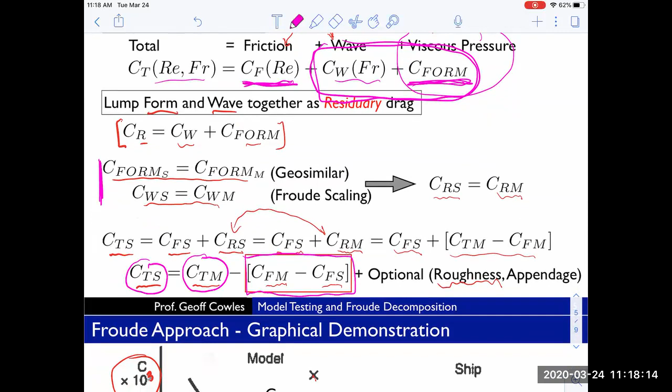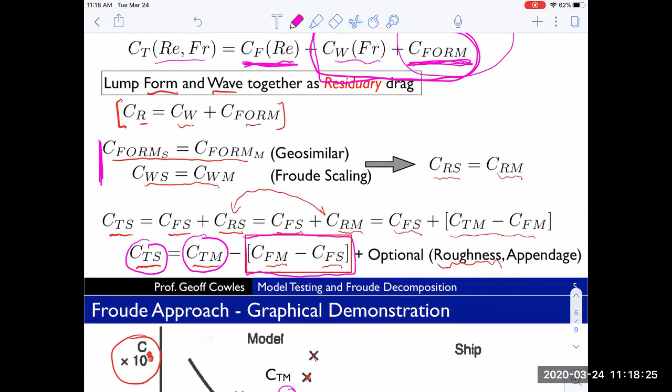But those frictional pieces we estimate, using the ITTC 57 curve, with the specific Reynolds numbers of those two cases, where the model Reynolds number is a lot smaller than the ship Reynolds number. So we end up with some positive number in that box because frictional drag coefficient declines with increasing Reynolds number. And the result is that the total drag coefficient on the ship is typically less than that on the model, which is what you see here.

In our little exercise today, we never explicitly computed, we could have, but we never explicitly computed the blue line, the residuary drag. We were given this, we explicitly computed this, we explicitly computed this, and if you're given the total drag coefficient and you explicitly compute this, you have intrinsically at your hand CRM, but all you're doing is essentially translating it down here, looking at the difference between this level and this level right here, which is the difference in the frictional resistance. You're pulling away from the total, this difference, to shrink it down to here at this position, and then you add on this delta CF to get back up here. That's essentially what the algebraic formula does.

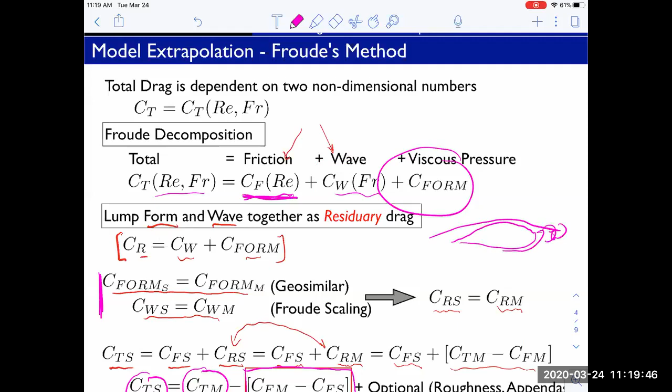So the differences with the standard method, which we're talking about Thursday, are kind of subtle, but they're important. And really what the standard model decided was that this piece here, this form piece, which has to do with, think about a ship, top view, the flow comes over, and we tend to have flow in the wake here. The nature of that wake flow, in fact, I think I have a better shot of it in the figure. Let me go back to that.

No, maybe not. The nature of the flow in the wake here depends on the Reynolds number. And so in Froude's case, in the Froude method, it's assumed that it does not depend on the Reynolds number, the nature of the wake, the type of eddies that are formed, how much separation there is. But the reality is, as we saw maybe in a really exaggerated effect with the golf ball or the cylinder we were talking about, the nature of flow separation on a cylinder is a function of Reynolds number.

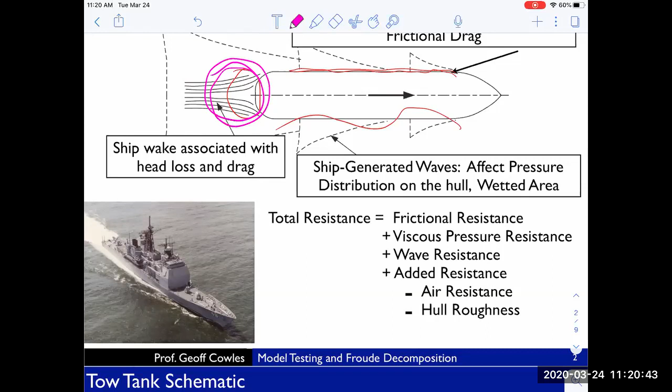We looked in the very early part of the class when we were looking at flow over a cylinder, drag coefficient of a cylinder is a function of Reynolds number. We saw it's highly dependent, particularly in a particular region. It's very sensitive to Reynolds number. So the nature of flow separation, how much there is, which influences this viscous pressure coefficient, or what many people call form drag, is Reynolds dependent.

And so the improvement that was made was they came back in and said, this thing right here, we're going to make Reynolds dependent to try to make the physics a little bit more accurate, with the hope that the model scaling procedure could be more accurate, that we could improve the process of taking models and scaling them up.

The reality with all of these things is that the larger your model scaling ratio gets, the worse your approximation gets. So if your model's, for example, the same size as your full scale ship, then you get a perfect representation of the full scale drag. As you drop that model scale down and the discrepancy between the Reynolds numbers gets bigger and bigger, then you start to incur errors because of the assumptions that are inherent in these processes.

And so what they were finding is, in the sort of early days, the kind of rule of thumb was they didn't want to go below a third scale for the models. They started finding below a third scale, the errors just started swamping them, and they were getting incorrect numbers, incorrect answers. As time went on, they improved the scaling procedure. And now, today they use these sort of 1/25th scale models, and they're getting information out of them that's useful for the full scale design.

So Thursday, we're going to cover the standard, what is the standardized method. And it will look very much like this with just a subtle difference.

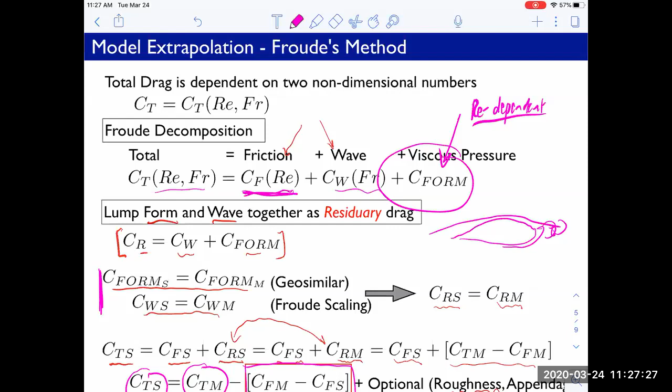All right, while he's doing other stuff, can anyone hear my mic?